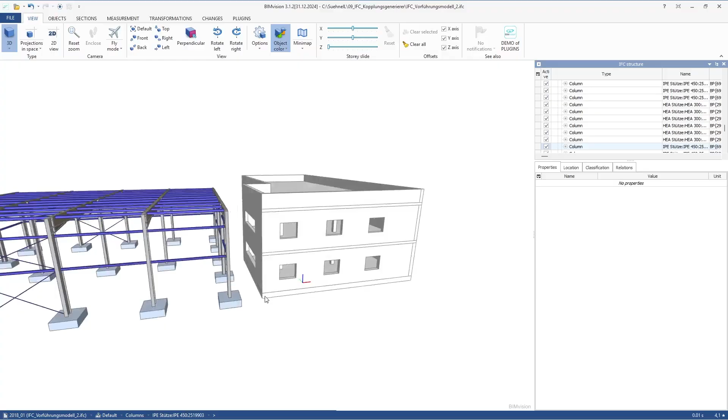Let's start directly with the IFC model that I want to use for today's presentation. I'm using the BIMvision IFC viewer for that. You can see it's some mixed structure. We have a steel structure on the left-hand side and a regular simple concrete structure on the right-hand side with some columns inside and so on.

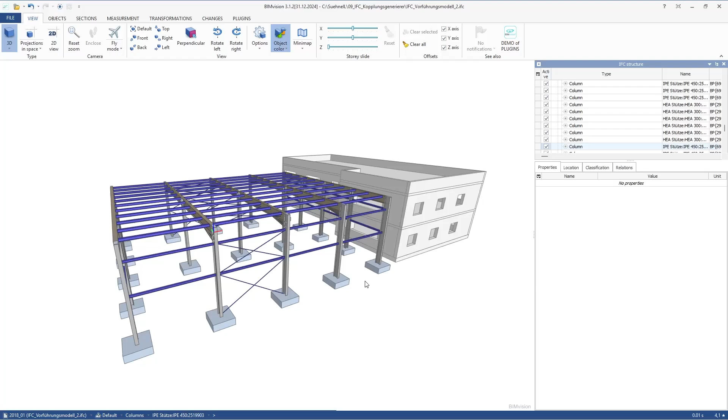Concerning the steel structure, there are already some steel joints included, some bolts, some stiffeners and so on. So this is the IFC file that I want to use for the creation of the analytical model in RFEM 6.

How can we use such an IFC file? This can come from Revit, Tekla, or any other CAD program. How can we use it? Well, let me show you in RFEM 6 directly.

First of all, we have to import the IFC file. I think this is clear. Via File, Import, IFC. That's the right path. I can select the IFC model and import it.

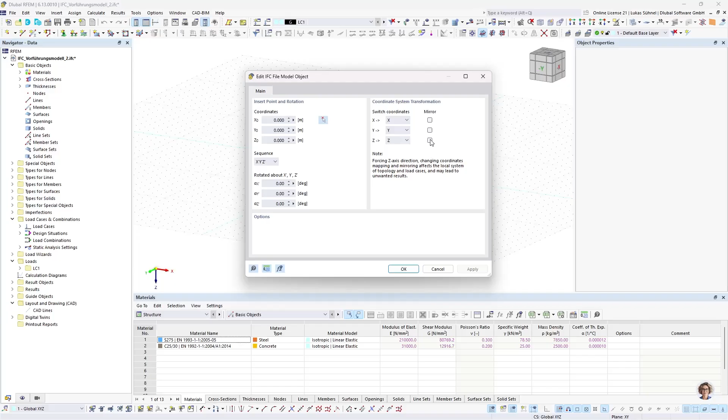Now, the first screen that will show up is dealing with the insertion point and the mirroring of these structures. Usually you will have to mirror it. In the CAD software, the Z-axis usually shows upwards, but in RFEM 6 often downwards. So in my case here, I have to mirror the Z and the Y-axis.

Then the import will be started, and in a couple of seconds we will see the IFC file. All right, so that is the IFC file that we just imported, that we also saw in the BIMvision viewer. And we can also show it inside RFEM 6.

So what we currently see, this is no native data. We do not have any members, we don't have any surfaces. The objects that we see here are IFC objects, graphical objects. And we can display them because we have an IFC viewer integrated, as we can see here.

And if we click on an object, we can also see the properties. Similar to any other IFC viewer, we can see that this is an IPE 450. Concerning the materials, it's German, but it's a metal, it's a steel S235. So we can display also the information from those IFC objects in RFEM 6.

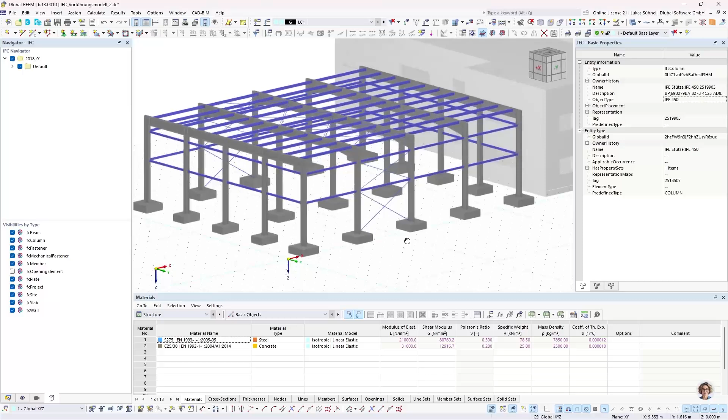On the left-hand side, we have an additional navigator, and this navigator allows us basically to hide specific objects, specific members maybe, or in general whole IFC entities. For example, the fasteners here - I don't need them here in RFEM 6 right now, they are of no use currently. Therefore, I can hide those fasteners and any other object that I'm currently not interested in.

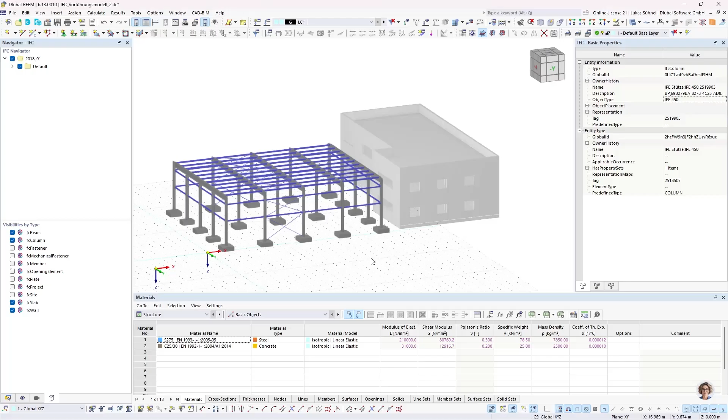So what is the next step? We have graphical objects, but we need native data. So it would be nice if we can convert IFC objects into members and surfaces and maybe solids. How can I do it? Well, this is quite easy.

When you have only the objects visible that you want to convert, you can select them and call up the context menu with the right mouse button and say here, convert into members, into surfaces or solids. Before we do this, we have to take care of the conversion. As we can see here, one more time, the material is so-called a metal construction steel S235.

This already contains basically the necessary information for the steel, but the whole name does not fit the name of our material in our own library. So after the conversion of such a steel, we will not get a valid material. Same for the cross-section, or for some of the cross-sections.

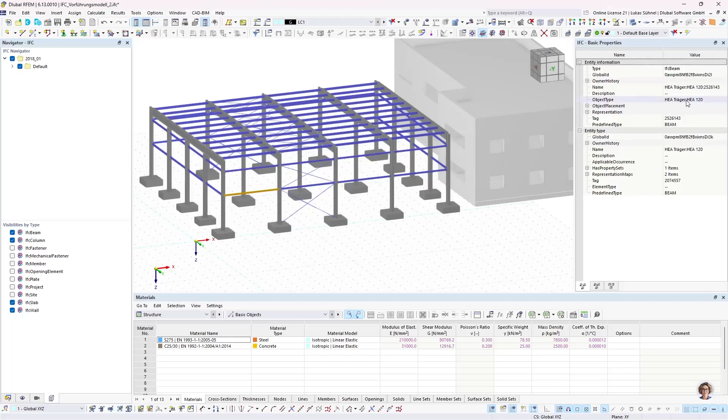The names are not always according to our database. For example, here the name is HEA beam HEA 120. This is not according to our library. So we have to convert these strings, basically these text fragments, into our own cross-section and material names. How can we do this?

Well, we have here under the CAD-BIM menu, the conversion tables, divided into material and cross-section conversion tables, and we will import the additional information from that IFC file into those tables. These tables will be extended whenever you import another IFC file. So it's not a one-time conversion table that you create here. You can use it again and again, the more you fill it.

Since mine is a bit messy here right now, let's start from scratch. I will delete all the materials and all the cross sections. Oh, this is really a lot. Let me do it a different way. I hope it works this way. I'm selecting the first and the second. Okay, now I have empty conversion tables and I can manually fill them.

That's also possible. Instead of the IFC import filling the tables, we can also manually fill them, using this little button on the right bottom here: add new entry from IFC object.

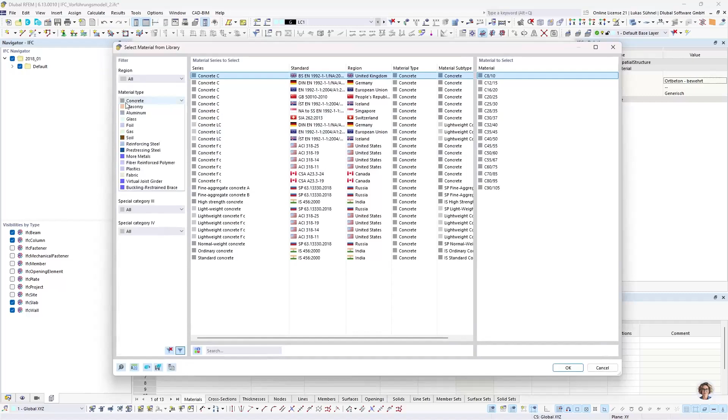And if I have it here, I can match it. I can click on these three points. Let's start with the concrete, because this is already the table that we see here. So I will pick here a concrete, C30/37, and make a copy. Concerning my steel, I change the filter, maybe search for an S235 according to the Eurocode. And then my material conversion is done.

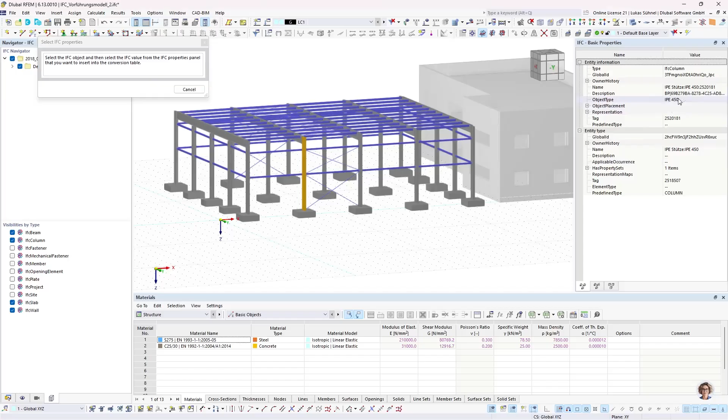And concerning the cross-section conversion, same logic. I can import the name from my columns, for example, here from the object type property, and it will import not just the IPE 450 name, it will import all the names that are written in the object type for the IFC column entity. Now I have also IFC beams, so I do it one more time.

I click on a new row here, select my beams. Again, for beams, IFC beam objects, I want to read the name from the object type here. And then I have all the necessary cross sections imported.

And now I can simply assign my cross sections from the library. Let me do it here. IPE 450, I think it was. Did I type it in? Yes. Okay, takes a second for some reason.

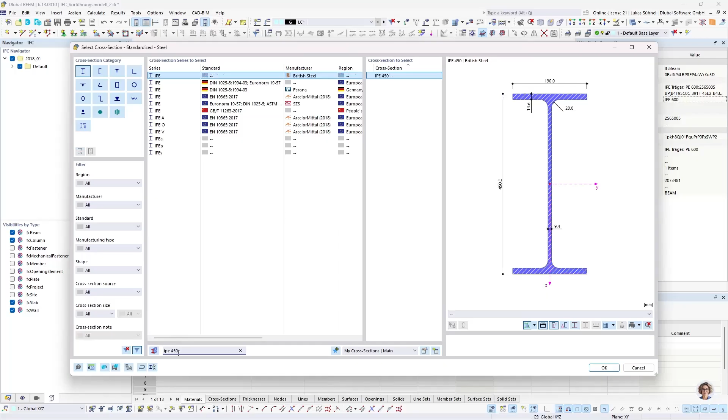According to some Euronorm manufacturer or related manufacturer, then I can copy it, just rename it here, IPE 600, and then I do it one more time for the HEA. Oh, I can say HEA 300.

All right, copy it, and then just change the numbers. And for the round bar, I just type in R20. Here I know the description, and it's an R20 section. For rectangular sections, we don't have to do it. The program will automatically detect the right dimensions.

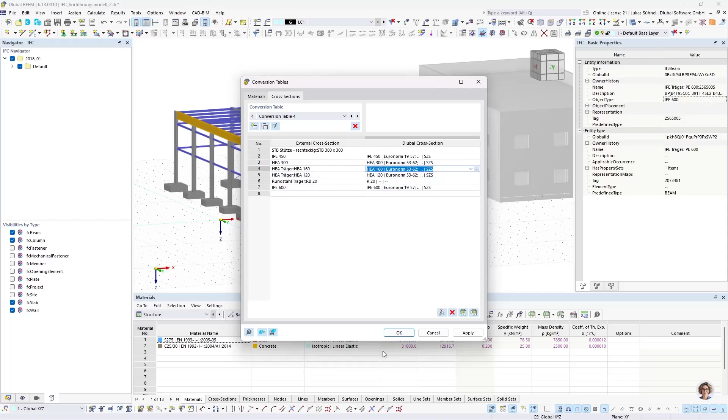So this was a little bit of work, but as I said, these tables will be saved. So next time you run an import, these cross sections will be covered, and you can basically use it again and again. All right, now conversion is done. The material and section conversion tables are ready.

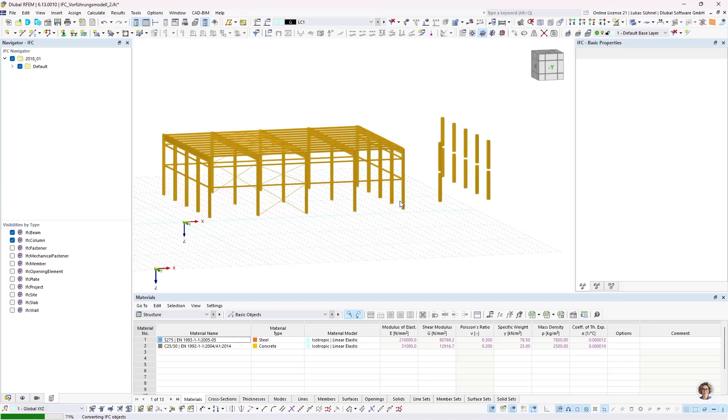We can do the conversion now of the beams. So let's hide some additional IFC objects to select all member-like objects in one step. Right mouse button and convert into straight members. Conversion is running on the bottom left side, you can see that, and it's done.

And now let's do it also for the slabs and walls. And even though there are some RFEM members in the background, it doesn't matter. We can right mouse button here, select the IFC model objects, and say here one more time, convert into surfaces.

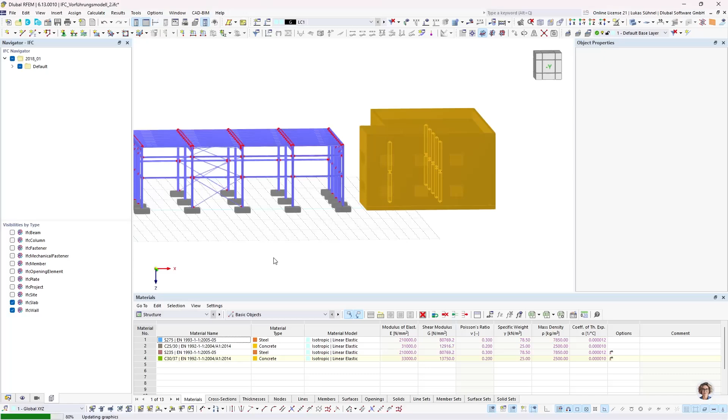All right, so now these objects that we see are native RFEM objects. We have here members and surfaces. And we can also double check if the location is correct.

How can we do it? For example, by switching the model data on and off. I deactivated the object types here, so this is my IFC, as you can see. And if I show my model...

You can see it's basically on the same location. Yeah, it's identical to the IFC. All right, so that's good.

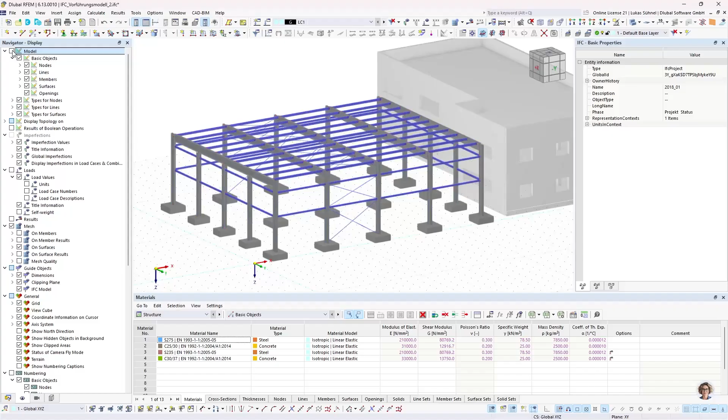We used the information from the IFC to get the right cross sections, the right materials into RFEM 6. Also, the thicknesses of the slabs and walls was taken from the IFC. So that is quite nice.

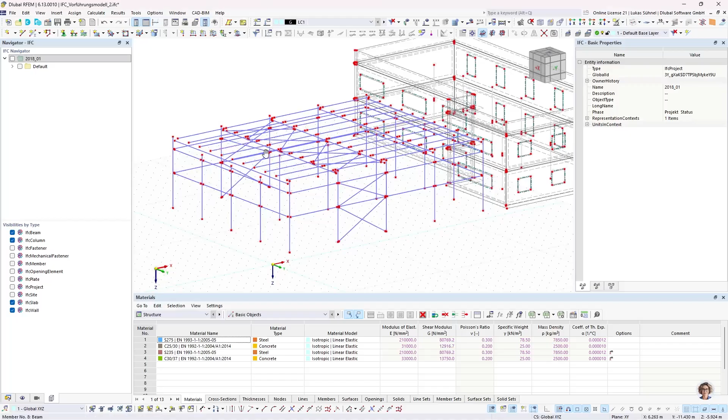What is not so nice, but it is, I think, a common or well-known topic, is that the elements are not connected here. Why is that the case? I think it's quite clear, but let me briefly explain it one more time.

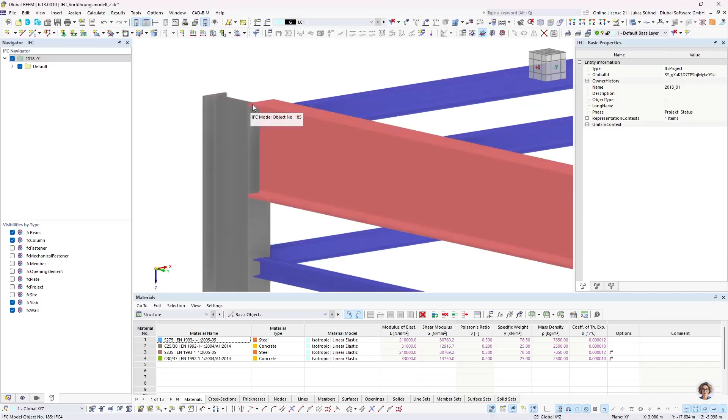With the conversion into members, we create the center lines of these objects, and these center lines have a start and end point, based on the start and end point of that IFC object. Since this beam is connected to the flange of the column and not the center line, and the center line of the column is in the center, there will be a gap.

Let me show it one more time here on this specific example with the wireframe model. I think it's clear where the gap is coming from. So what can we do about it?

We were always able to use functions in RFEM 6 to elongate members. I was always able to select a couple of members and say, extend and trim these members, extend them to the next member in line in both directions, and then those coupling members will be connected to the columns.

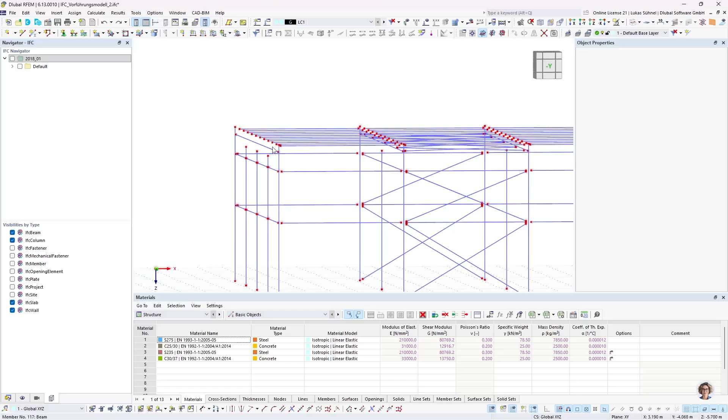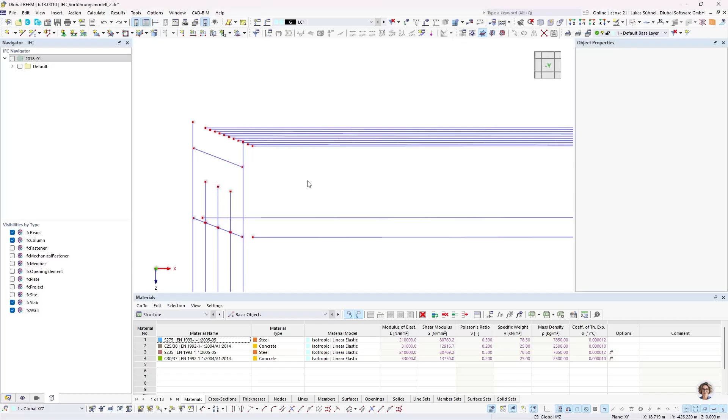This is working fine for this scenario here, for this single case. It is not working in such a way for these coupling members in the roof plane, simply because they are eccentric - they are not in the same level as the main beam. So a simple elongation extension will not solve it. I would have to project all these members into the plane of this beam, and then I can extend them. So it's quite a lot of work to connect this whole model together.

So what else would be an option? Another option could be that we create couplings between these nodes and members and members and members and so on. And this is what we used as an idea for the next features that I want to show you.

We recently implemented 2 new objects, and you can find them in the types for nodes and types for lines. We call them nodal link and line link. And a nodal link is basically a little generator that creates rigid members. I'll show it in a second.

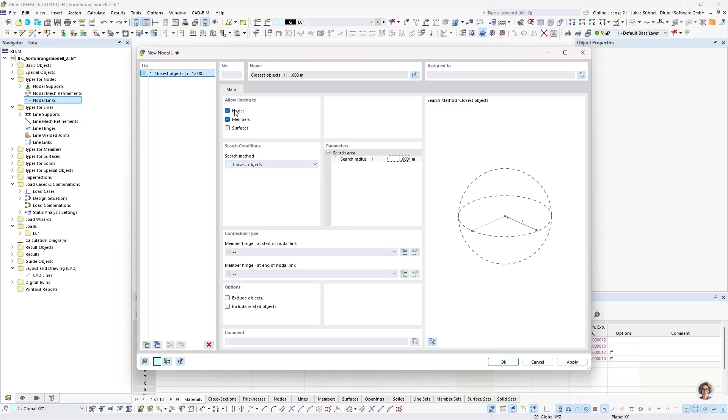So what does this nodal link do? It will create a rigid link from a node that I select, and it will search for other nodes or other members or surfaces in a defined search area, a search radius. So as an example, I can select a node...

Let's do it for one first. I can select, for example, this node here from the main beam, and say please connect to the next member within a 1 meter radius. I say okay, and it will connect to my column, which is good - this is what I want. And what will it do? As I said, it will create a rigid member.

So what could we do now? We can go into this nodal link and say, instead of just starting from one node, let's select all the nodes. Maybe also these down here. Say okay, and please search for another member close to your location, and let's see what happens.

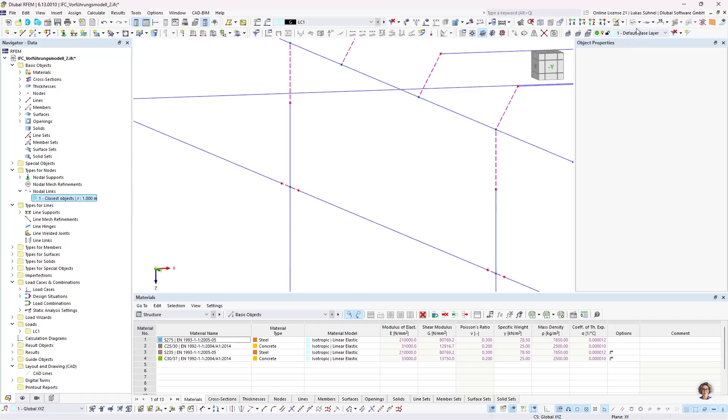We can see that a lot of those nodes, more or less all of them, will be connected to a member close by, and it's looking actually not that bad. I'm showing the center, this wireframe model, because it's more visible, but for the general orientation, all these coupling members in the roof plane are now connected to the columns and to the beams and so on. This is looking quite nice, not bad for spending not even half a minute on it.

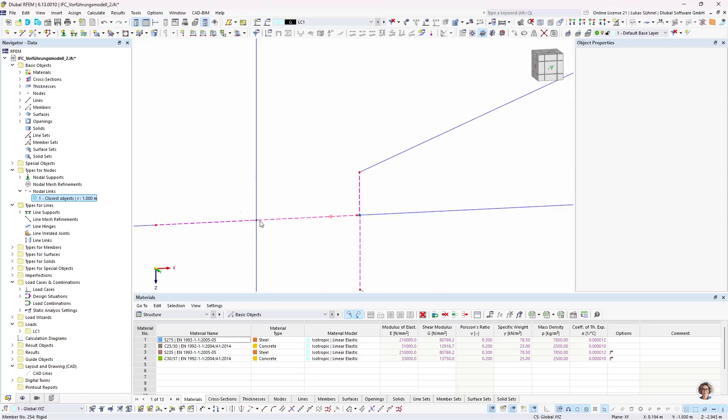Let's have a further look here at the diagonals. And here we see, well, that's maybe not the expected result. I have here the diagonal members - they are not connecting to this node on the column, they are connecting to these coupling members, and this is actually not what I want to have here for my analytical model. The same for the diagonals down here and for other joints as well. So that's one little concern where we maybe have to do something about it.

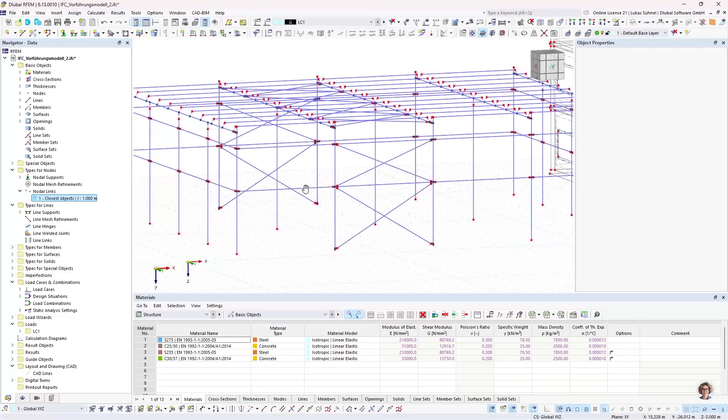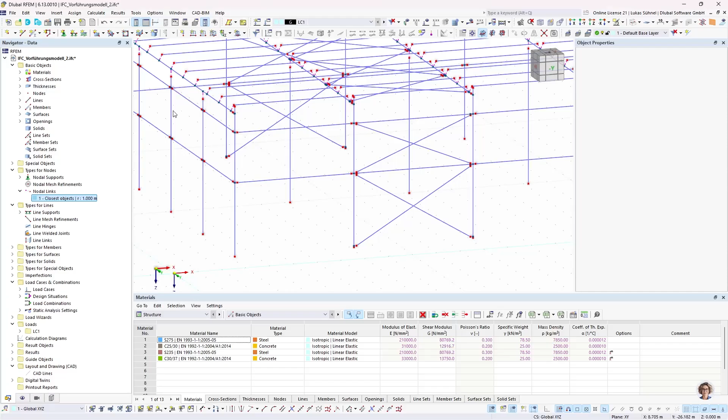The other thing is this one node link creates rigid members, and according to what I defined here, they have no hinge. So every object is connected rigidly to the other object. So we have a completely rigid steel structure now, which is not correct for the later structural analysis. So what can we do against it?

Well, we could create multiple nodal links and spend a little bit more time on selecting the nodes properly. So let me remove this one here, and let's think what we want to connect first.

Let's say we have different cross sections in the structure, and one is, for example, the IPE 600s. These are the main beams of my structure, and they have to be connected to my columns. So one node link could deal with the connection of my main beams, these nodes, to my columns, so members close by. This node link should look for members, and it should be a rigid connection, so I'm not defining any hinge. And this is done now here. We can see all these couplings between the main beams and the columns are done.

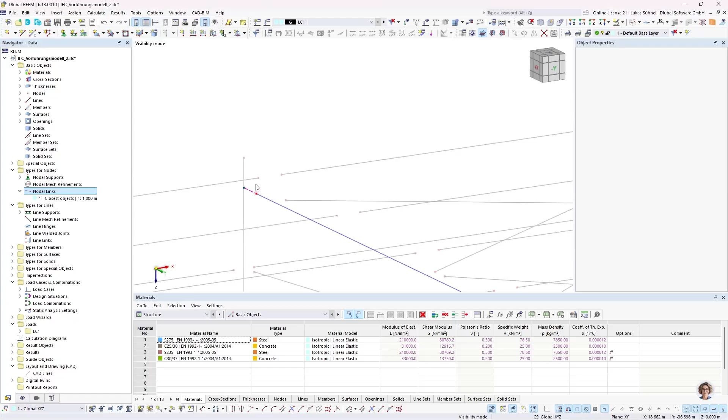And if we want to be really nice, we can even rename this nodal link and call it, I don't know, column beam link or something like that.

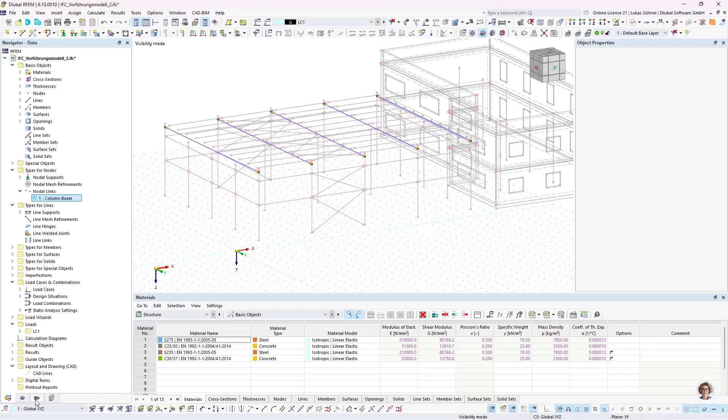Then we can create another coupling. What could be the next one? Let's have a look. We have additional columns down here, I think the IPE 450. Yeah, so these center columns here, they have to be connected to the main beams, and also these columns on the outer frames should be the HEA 300. Also, those have to be connected to the main beams.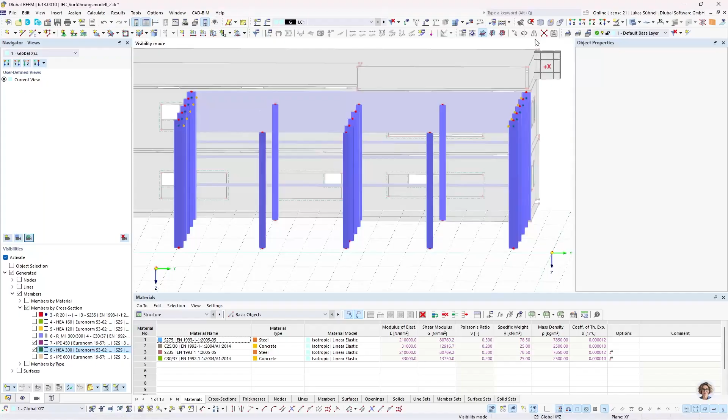So another nodal link could be, let's call it inner column beam. And again, we are looking for connections from specific nodes, which I can select now, to members close by. Maybe we want to connect them not rigidly, but hinged. So we can create a member hinge and connect them. So now they're also connected.

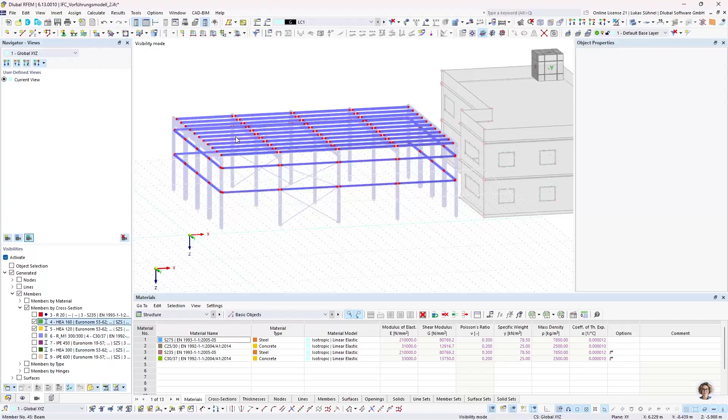And in this way, we can continue. And I want to do it so you can see maybe some obstacles that we will also face here. The next one will already show one of these little obstacles. So let's say we want to connect all the coupling members from my structure, which is usually between my frames. They should be connected to the columns and so on, and to the main beam. So another nodal link - I skip the renaming now, I think it's clear how it's working.

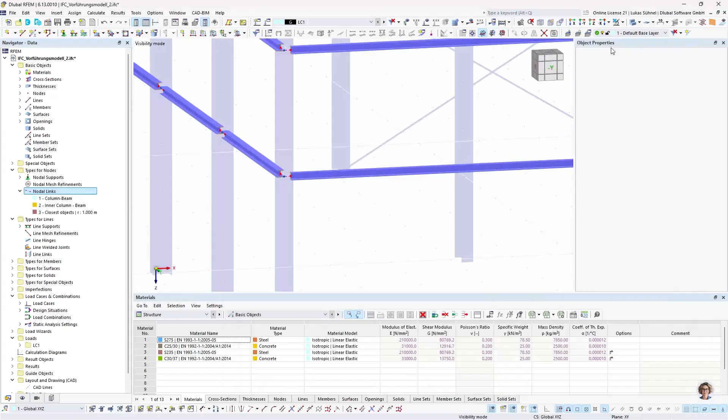So I select all of those nodes, and again I say please look for members close by, and maybe use a hinged connection. Okay, now all those members have been linked to columns and so on, like I wanted, apart from these situations here, where I have the diagonals.

From that node, it should look for another member close by, and it's not the column - the member that is even closer to this node is this diagonal. So it's connecting this way. It's logical, but it's not what I want to have here.

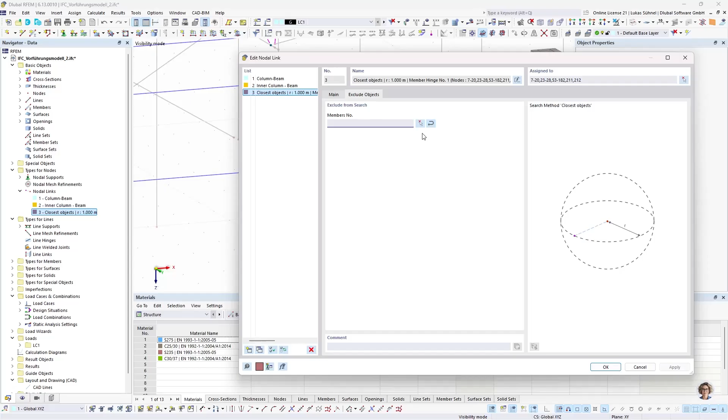So what can I do about it? I can go into this nodal link and say, please exclude certain objects from this search. Please do not connect to my bracing members - exclude the bracing members from my search. And what will happen is this coupling member will now be connected to my column as I expected, and not to my diagonal beams here.

So that's good, let's continue. I think there's only one rule remaining for the diagonals. And what do I want to achieve? I want my diagonals to be connected to this specific node here, should be connected to the columns, not to my coupling members. So what will I do?

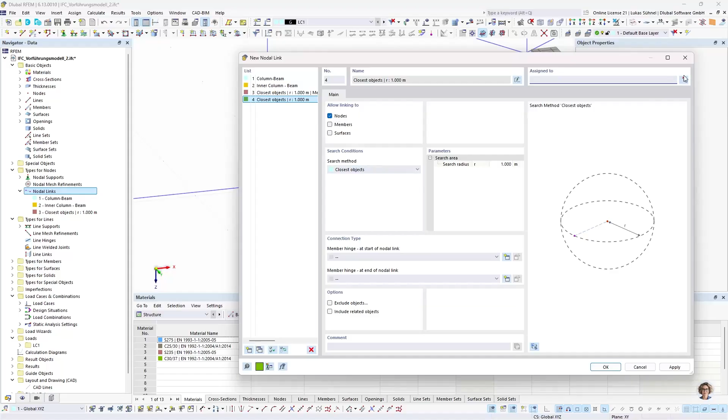I create another nodal link and I say, this time the selected nodes - let's select them quickly - these selected nodes, the end nodes of my diagonals, from those nodes, please look for another node, connect to another node, ideally the one on the column. So I press OK. And what will happen? I mean, expected - it will not connect to the center node of my column. It will connect to the end nodes of my coupling members.

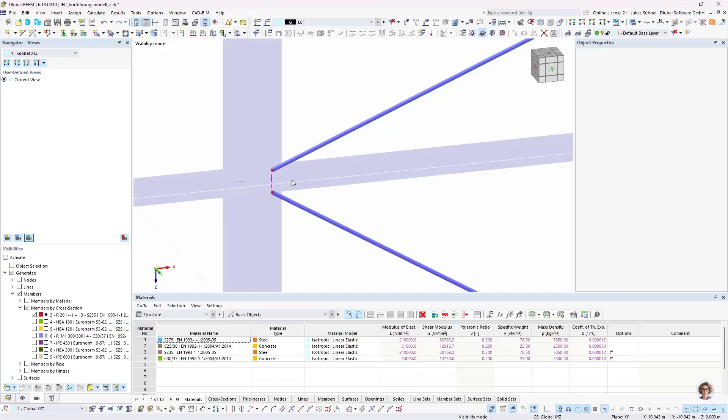So one more time, I have to go into my rule and say, hey, please exclude the coupling members, the nodes from my coupling members from your search. And now the diagonals are no longer allowed to connect to those nodes. I excluded them, so the next node in a radius of 1 meter is the node on the column. So that's why they will connect to this one.

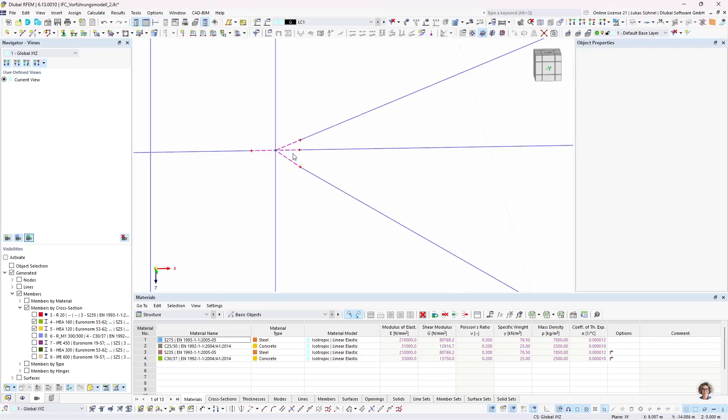And now my steel structure is connected properly, as I would expect it.

Okay, so far so good. Now, what can we do about the concrete building? If we have a closer look at this one, we can also see the walls and the slabs are not connected. Again, because of the same reason, the wall will end on the top and bottom side of the slab, so there will be a gap. How can we close this gap?

Well, we not only have the node links, we also have the line links in RFEM 6, and they work in a similar way. From the lines that you select, it will create a rigid coupling to other lines or surfaces close by. So same logic, let's create one for the

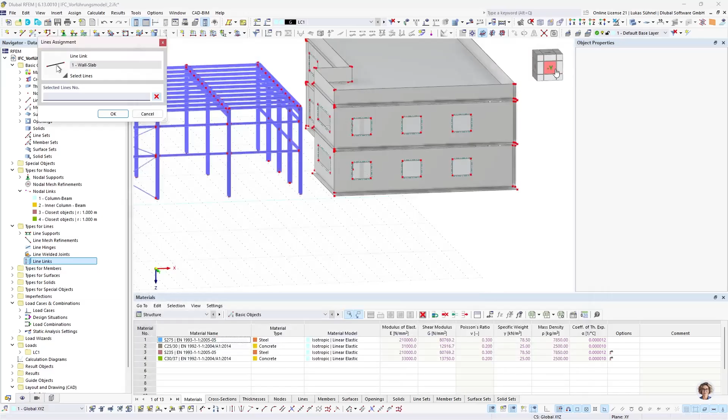wall slab coupling. What do I have to do in that case? Well, if I want to couple my walls with my slab, I have to select all the lines, basically the bottom lines of my walls and the top lines of my walls and so on. This is what I have to do here.

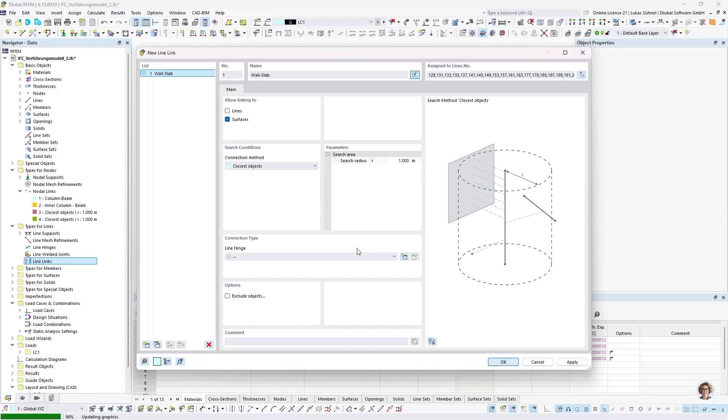Okay, it should look for surfaces close by and connect to those surfaces. This is what is happening here right now. It will create rigid links - that's how they are called. I named them incorrectly before. So this line link will create rigid links, and these links will connect the walls with the slab.

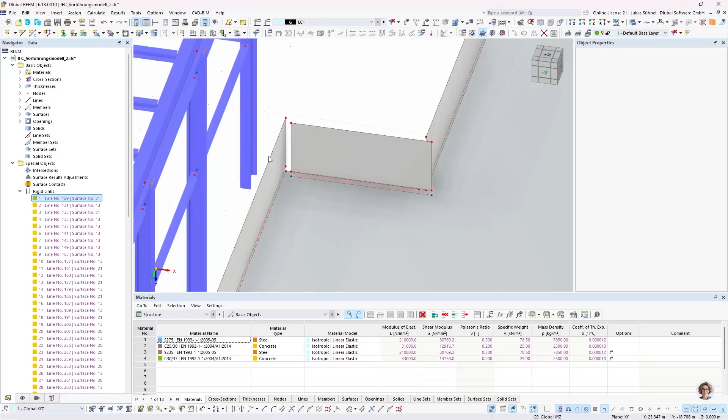So I would have to do the same again for my walls. I would have to select all the vertical lines for my walls so that they are connecting again with another slab, with another surface, which is a little bit of work. And I don't want to do it now because I think the logic is clear.

These are the nodal and the line links that we recently implemented, and they will help you generate a connected analytical model that you can later analyze, design, and so on. Now, the difficult part, or the part that currently we have to spend a lot of time on, is the selection of the nodes and lines for these line and nodal links. This is a bit work intense. It's quicker than anything we were able to do before, but it's still a bit work intense.

So our idea was to create a little generator that does this for you, that will select the objects. You can find this little generator in the model data, on the base data, in the settings and options. Here we have the rule-based link generator, and you can create a new rule set here, or you can also do it in the data navigator of RFEM 6. It doesn't matter, but the activation of the rule-based link generator has to be done here in the base data.

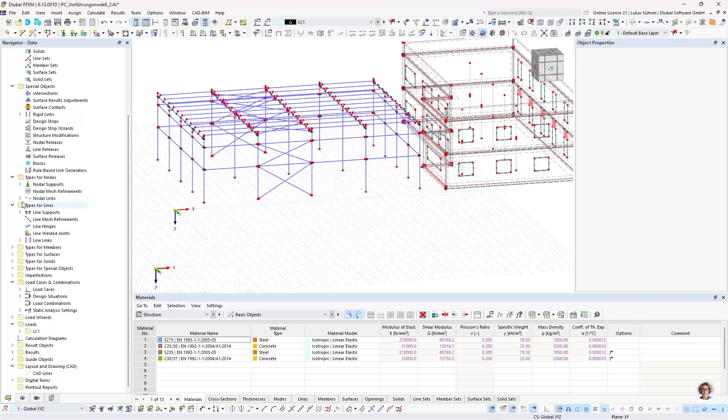So before we do this, we want to get rid of what we just created here manually. So I get rid of all these rules, and if I delete them, the nodal links and the line links, all these little rigid members and rigid links will be removed. So you're back to the completely unconnected model.

So what can I do? I can call up my rule-based link generator, and here I can define types, and those types will connect certain objects with other objects. For example, really simple, the wall type. The wall type will select all the vertical lines of surfaces, and from those vertical lines, it will create a line link. Inside that line link it's defined: please look for other surfaces. So when you select the vertical lines and say please search for other surfaces, it will connect to other walls. So this is the wall link.

We also have a wall slab link. I think it's clear what this one is doing - it's selecting the horizontal lines of surfaces and connects them and lets them search for other surfaces.

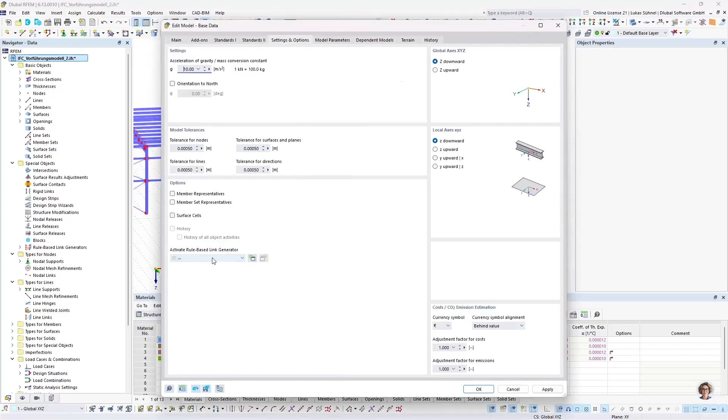And this is clear because I just explained it before. If we want to activate this generator, we have to do it here in the base data. So I can select the rule set one that I just defined. And now all those couplings will be generated.

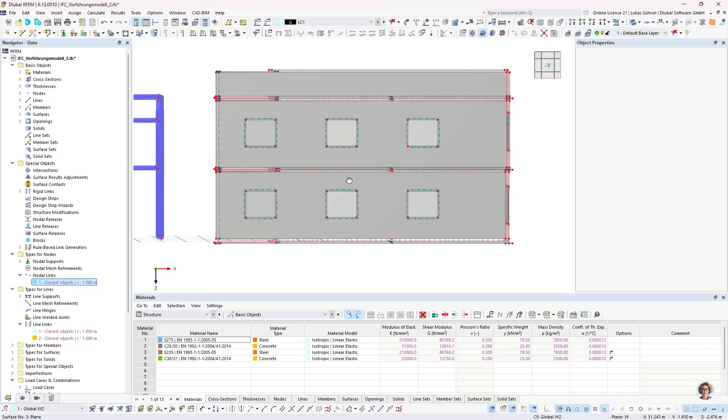Yeah, we can see it in the data navigator. It created now line links and also nodal links. The two line links are for the connection of the walls with the slab and for the walls with the other walls. So all the manual selection that I had to do beforehand, with the lines and so on, I can skip it. It's no longer necessary. This is what this rule-based link generator is doing.

And it also connected these columns with slabs, basically. So I'm done for the whole concrete model on the right-hand side. The only thing I have to do is define additional rules for my steel structure on the left-hand side, because this one is still unconnected, as we can see.

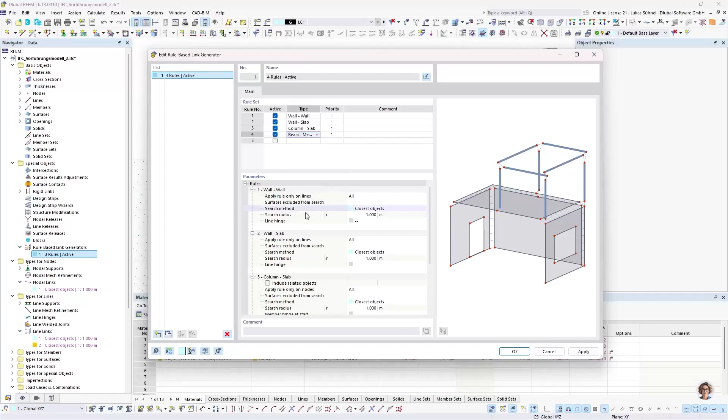And also for that, I have specific types. Let's have a look. I have, for example, here a beam member type. What is a beam member type? Beam means it will select the end nodes of members, of horizontal members, and connect them with other members close by.

This is a rule that I need, because I want to couple the coupling members with my columns, for example. I also want to have a coupling between my diagonals and my nodes. As we defined it beforehand, the diagonals should be connected to specific nodes. And last but not least, I want to have my columns connected to my members, to my beams.

So this rule will select the end nodes of vertical members, and search for other members. Yeah, this is the rule that I want to use to couple my columns with my main beams.

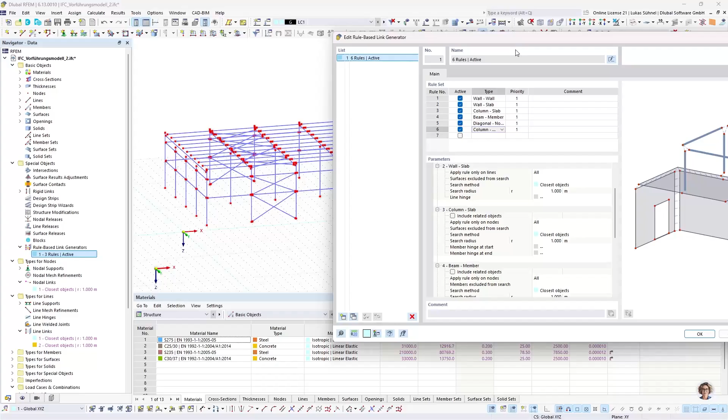Okay, I hope I didn't forget anything. Let's have a look what it will do. I press OK, and the rule will directly be used.

We can see here the coupling members will be connected to my columns. Also here in the roof plane, we can see the coupling members are connected to my main beam. So this is all looking quite nice.

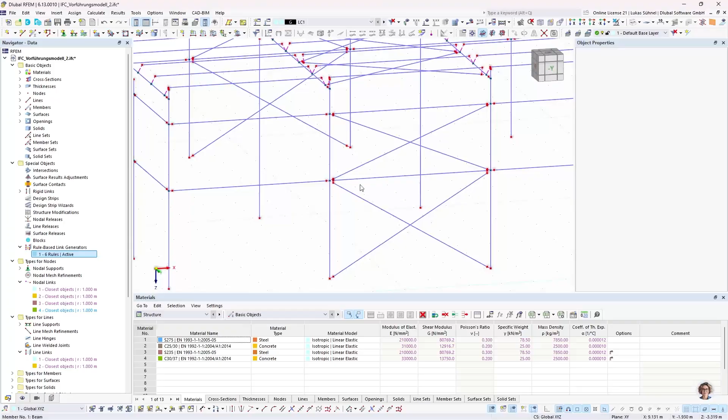We have a little issue here. My coupling member is not connected to my column. Instead, it will connect to the diagonal member. We had the same issue beforehand.

So we have to go into this rule-based link generator, select here the beam member rule, and inside that beam member rule, I have to say, please do not use the diagonal members for the connection. The same we did before, yeah? Please do not connect to the diagonals. Press OK.

And now, we can see it here, the coupling member is connected to the column. Now, the other issue that we have is, again, the same issue. The diagonals will not be connected to this node. They connect to this node.

So these kind of definitions, these detailed settings, they have to be done in the rule-based link generator, similar to what we did manually before. Yeah.

Exclude nodes from search. And here I select now all the nodes from my coupling members. And now the diagonals are connected properly as I would have imagined it.

So these kind of settings have to be done in the rule-based link generator as well. But the selection of the nodes from where we want to have a coupling, this is done automatically.

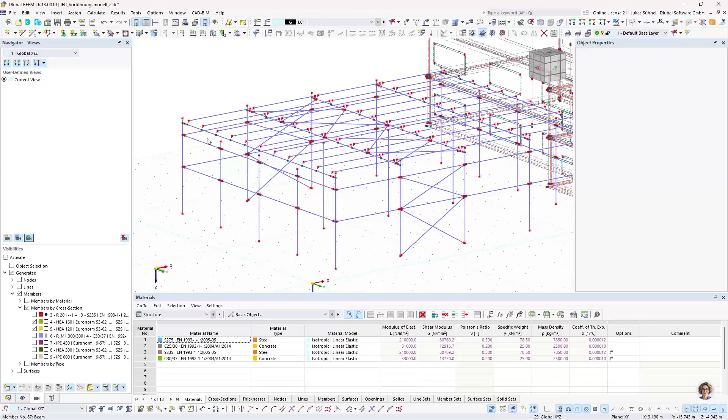And we're still not finished. As you can see here, the columns are not connected to the beams. There are also these inner columns not connected to my main beams, which is a little bit strange because, as you remember, we defined here this rule column member. So why is it not working?

Well, we already have a column slab rule. And this rule here in the beginning, or at the top, this one will be executed first because it has a lower object number. So this rule, what does it do?

It searches for the end nodes of vertical beams, of columns. Yeah, it searches for all the end nodes, and then it will try to connect these end nodes with a slab close by.

This rule will be used for all vertical members, for all columns, so also for the steel columns. But this is not correct. It should only be applied to those columns on the right-hand side. Because what is the issue?

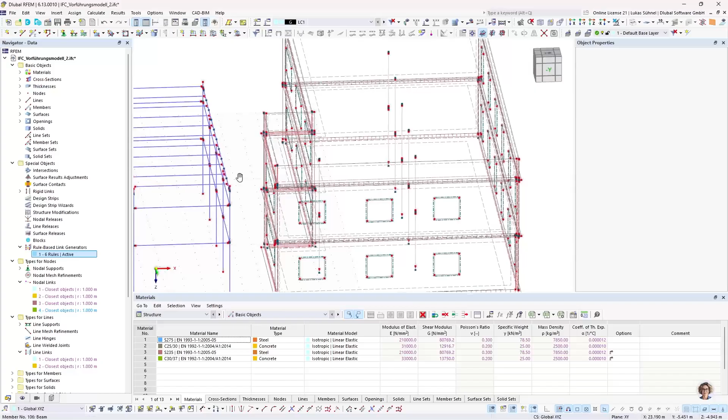This rule basically uses all these nodes, yeah, and then those nodes are no longer existing for the second column rule, where I'm looking for other members. So what can I do?

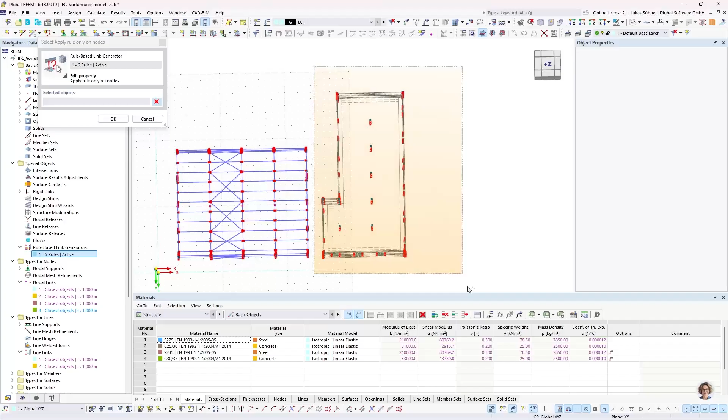I can go into the column slab rule and say here, please apply this rule only on this kind of structure here. It should not be applied on my steel structure. And by doing so, the nodes from my steel columns are no longer utilized by the column slab rule, so they are free again, and then the column member rule will use them to connect them to the beams, which is what I expect.

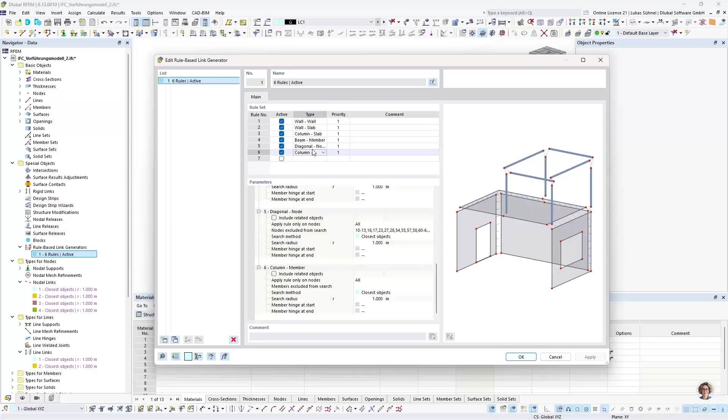So now it's looking better, they are connected. The only little issue is that the columns are now also connected one more time to the main beam. This is not okay - I don't want the connection from this column to this beam. So here I can go back into my rule-based link generator, and in this column member rule, I have to change the search radius a bit so that it no longer connects this node with the beam.

Now I have a properly connected analytical model for the steel structure and for my concrete structure. And all I have to do now is define some supports.

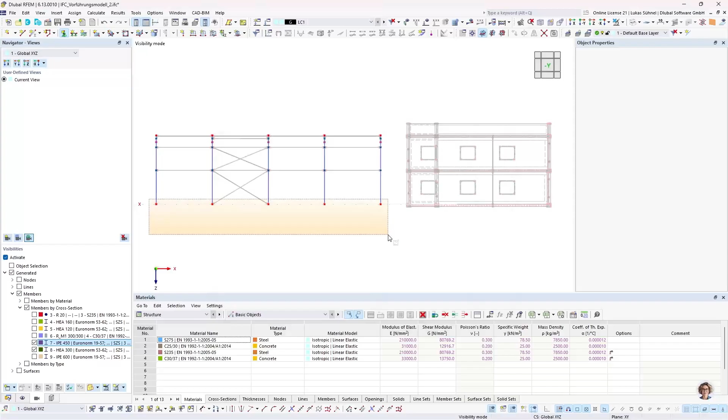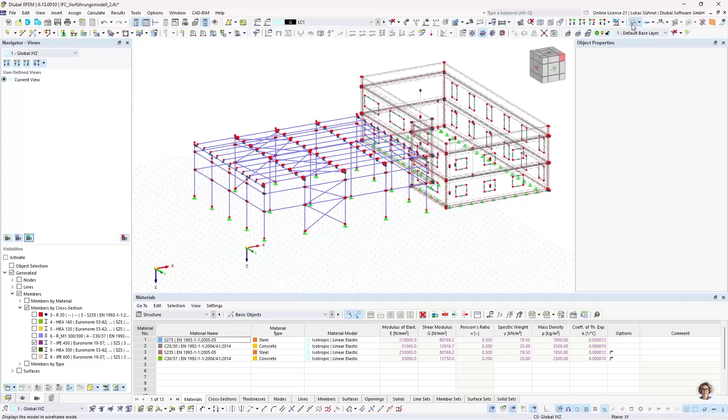And then we also want to support the concrete structure, the foundation slab basically. Now the structure is supported and we can run the static analysis. I hope I made no mistake.

This is just a little hint that we have lines which are equal, which is fine. They are the result of the line links of the coupling between the walls and the slab. We have a wall on top of the slab and a wall below the slab, and from both walls we are connecting to the slab. We are creating generated lines on the slab and they are identical, so that's why we have this little warning about lines lying on top of each other, but it doesn't matter.

So now we have the results. What can we see here? Let's change a bit to the wireframe mode. We can see the deformations.

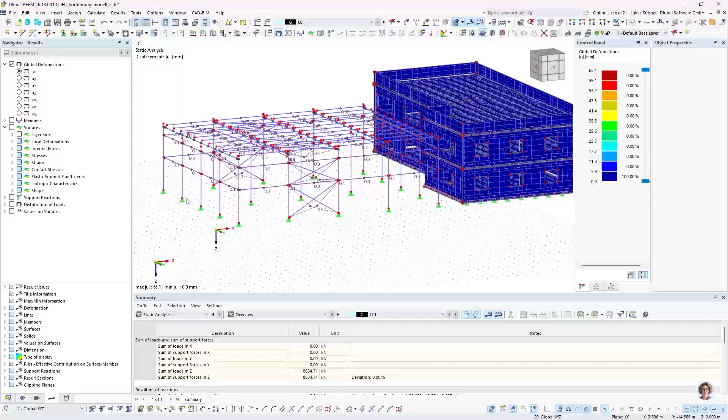Maybe something I forgot to define here are some hinges for the bracing members - that's one thing I can optimize. But apart from that, I have here my internal forces, axial forces, bending moments, and so on. And if you compare it to a model that you build up in the common way, you will see that they are quite identical.

So the static analysis can easily be done with this model that we now connected with the rule-based link generator. Now we can continue with applying loads, running a steel design for buckling, lateral torsional buckling, and so on. I have to say there are some exceptions which we are aware of, which we will work on.

This is, for example, if we want to run the steel joint analysis right now - due to the fact that we are using rigid members here, we currently can't use our steel joint add-on. It simply does not acknowledge these rigid members.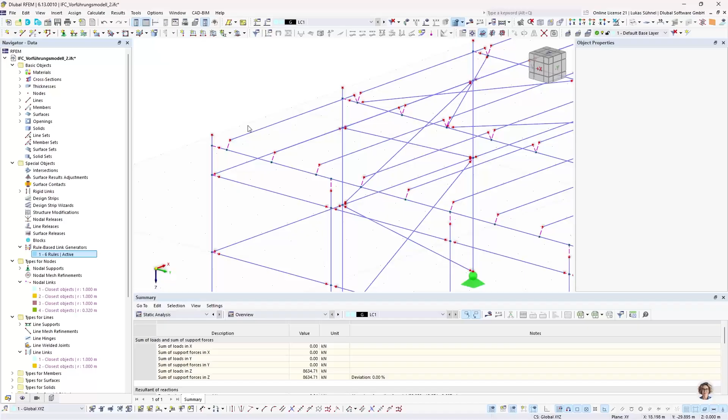But we already have a plan how we want to treat this, so that you can continue working in your common way, in the common logic of RFEM 6, so that such joints can also be designed in the steel joints add-on. Similar to the punching design for concrete, currently...

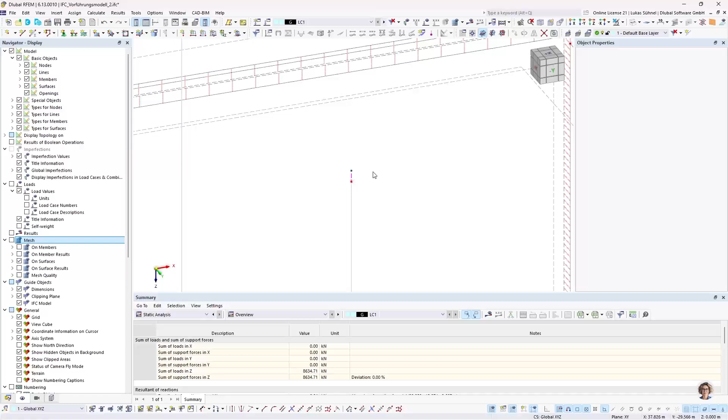It's not, how should I show it - the columns are not directly connected to the slab, so we are not aware of the cross-section from the column. Now it's this little rigid member. So again, there are some optimizations necessary in our design add-ons so that we can keep working with them in the way that we know, that we are used to.

But as a first step for using IFC files, I think this is the right direction. The rule-based link generator for, let's say, a more automated connection, or maybe the nodal links and the line links manually for a little bit more manual modeling. They can be used to connect these otherwise unconnected, converted IFC file objects.

So far regarding those two features, what else can I show you here? These generated objects, the objects that we generate from the rule-based link generator, or also these objects that we create from the nodal links and line links, we can always...

Convert them into, let's say, ungenerated objects. So right now I have used my rule-based link generator to create nodal links and line links. These objects are now generated, I can't modify them because, as I said, they are generated. You can, however, do it - you can unconnect them, cancel the generated state, and then they are open for your manual modification.

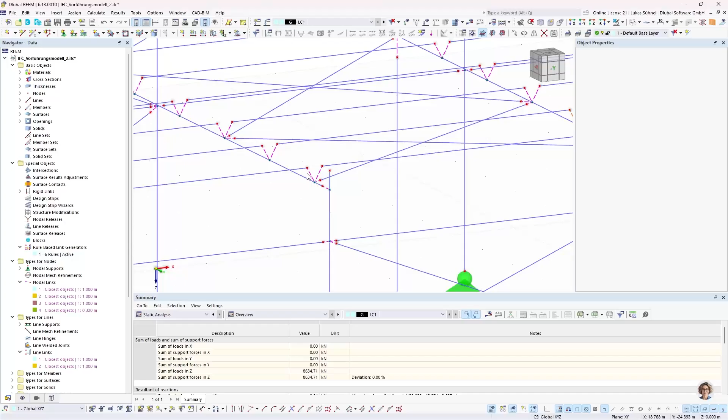So the same for the rigid members that we create with the nodal links - you can always cancel this generated state, and then this rigid member can manually be modified again. So even though maybe the final result of this generation is not 100% according to your expectation, you can use it to generate the objects and then use them for further modeling by canceling the generated state. That's what I wanted to mention.

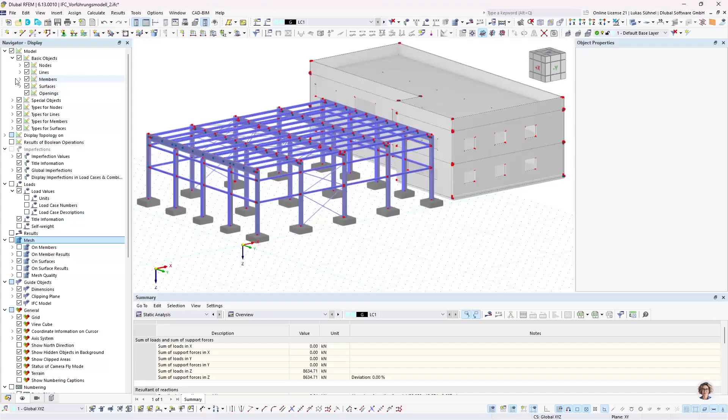The other thing I want to show, as we switch to the export chapter of the IFC model, is the saving of originally imported information from IFC objects. We imported an IFC model, so let me show it again. I'm hiding my RFEM member. We can see this is one of the IFC objects we imported, and here is the global ID, 0TLI7 and so on. The global ID is quite important because when we later want to compare IFC models, this is usually what's used to identify objects. It's a unique ID.

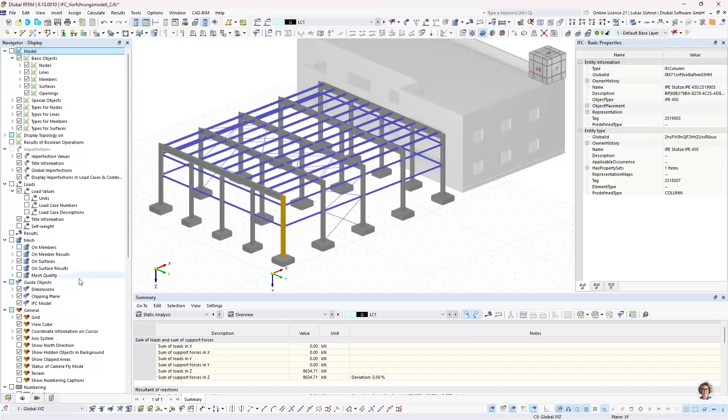This unique ID will also be saved inside our members. So now I'm in the native RFEM data, and if I double click on this member, we have this BIM tab. In here we see all the information from the IFC file, for example the global ID, 0TLI7, what I just mentioned. When we now run an IFC export, this information will again be used in the IFC object created from RFEM. So let's do it one more time.

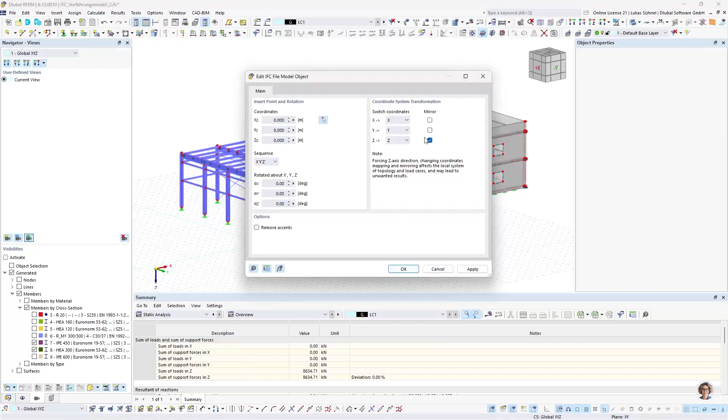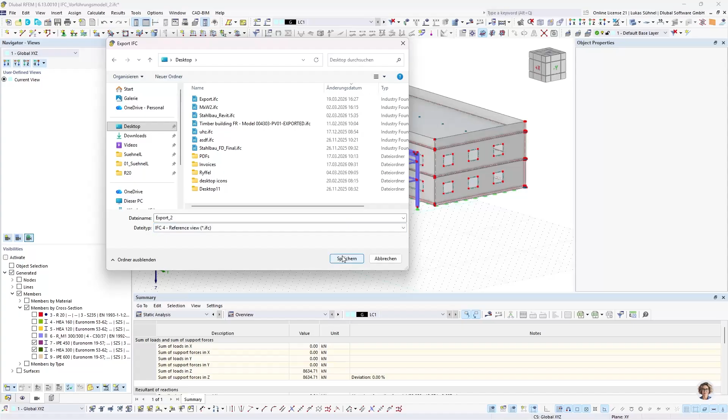Let's do it here: File, Export, IFC. I'm mirroring this one again, put it on my desktop. Export to - I can select here reference or structural analysis view. In the old software generation we always had only a structural analysis view export. With RFEM 6, you can also export into the IFC4 reference view, and this is an IFC file that other IFC viewers and CAD programs can usually open.

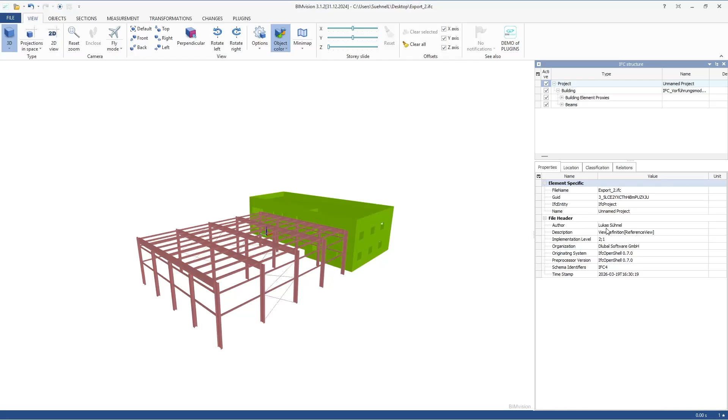So the export should be done. Let me quickly open this file - IFC export... Export_2.ifc. So here we are, this is the IFC file just created with the Dlubal Software. We can again see these elements. We get the information from the cross section, and here is also mentioned the material according to RFEM 6, S235, and the material standard.

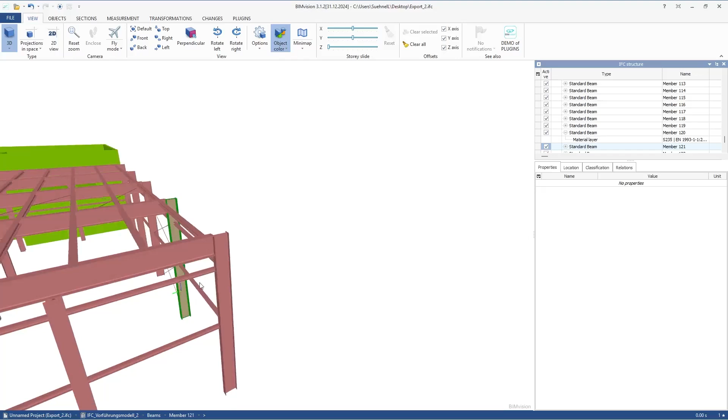And if we click on the same column again, this one here, we can also see it has the same GUID. So this IFC file exported from RFEM 6 can actually be used for comparison with the original IFC file, maybe to track changes, track if we used a different cross-section or material, or if we moved the object around, because the GUID is the same. And with this new logic of coupling elements, these IFC files also look nicer - the beam stops at the location of the column, not intersecting the column into the center line, as usually happens with regular modeling of analytical files. So this is a little bit of a benefit of this new way to model your analytical models.

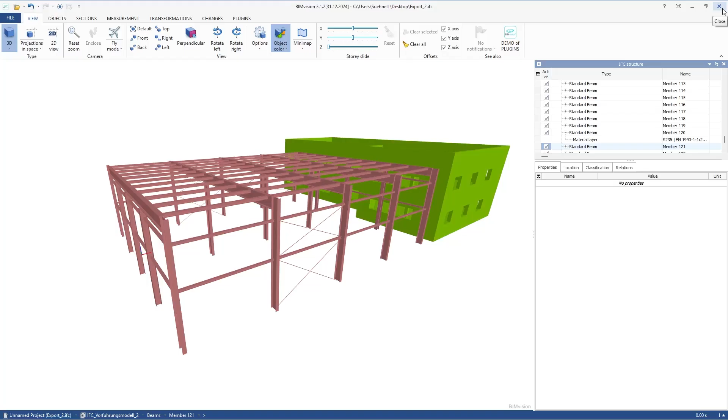And with that being said, I am at the end of my part. I hope I was able to show you some new features - the nodal links, the line links, and the rule-based link generator. I hope they help you in further use cases where you want to work with IFC files. If you have any feedback, please let us know. And again, with that being said, I hand it back to you, Andreas.